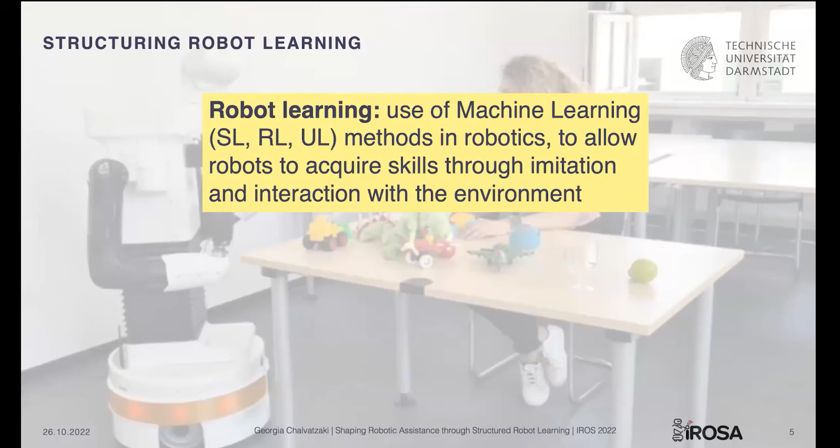I hope you all know that robot learning is the field that uses machine learning in robotics to allow robots to acquire skills through imitation and interaction with the environment. Now, to give you the gist about the research in my group, iROSA, we take into account the structure of the problem to enable faster, safer, and scalable learning of robot behaviors.

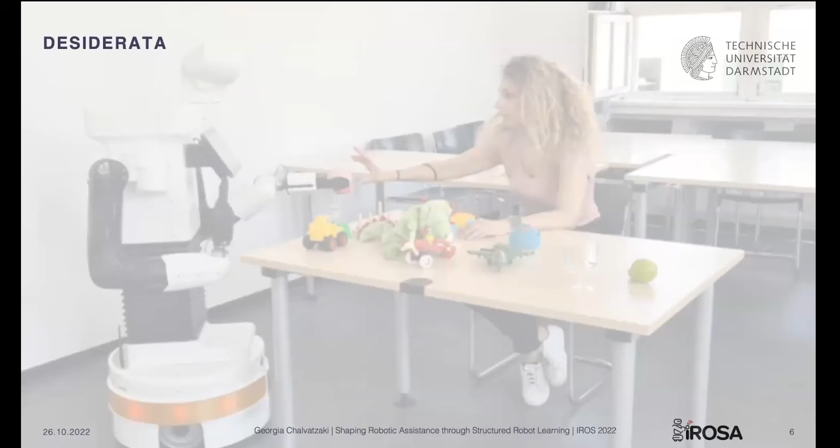And what can we achieve with structured robot learning? Three key properties that, in my opinion, are necessary for robots to acquire behaviors like the ones of Rosie the robot. First, coordinated and generalized manipulation skills. Next, fluid and safe human-robot interaction. And third, scalable long horizon behaviors.

Now I will point you to 5 key areas in which structure couples with robot learning to give us a flavor of our desiderata of assistive behaviors.

But before we start, let's take a look at this handover scene. The robot needs to understand the intention of the human, and it needs to effectively coordinate and position itself in the environment, and be able to understand grasping actions up to the delivery of the object. Most importantly, it should act safely. And this is where structure comes into the game.

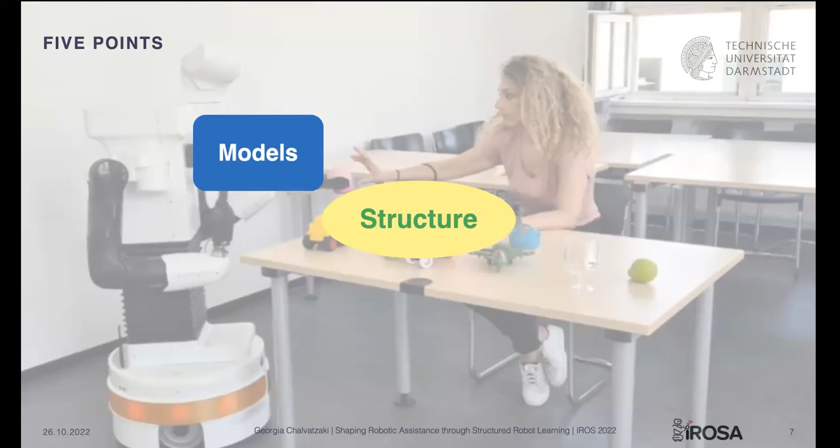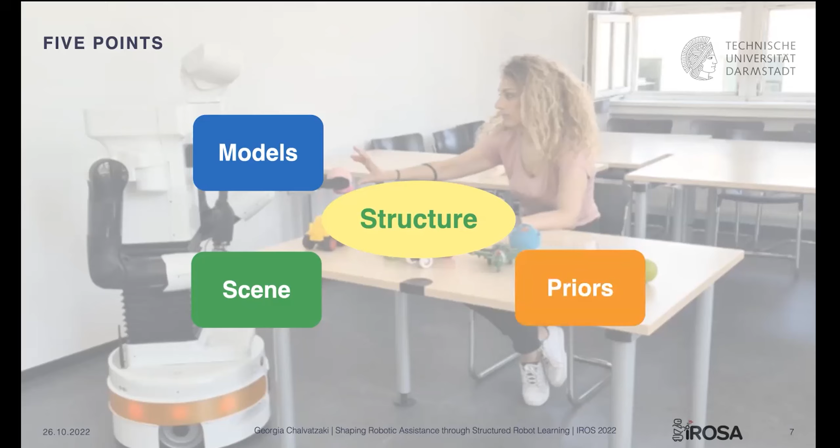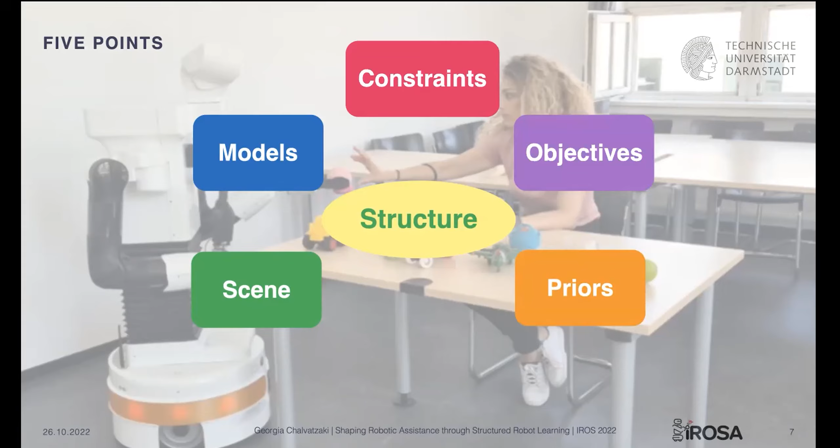So first, we will see how we can structure models for effective human-robot interaction. Then we will see how we can exploit the scene structure to learn long horizon behaviors for manipulation. Next, we will see how we can exploit the structure of the robot itself as a prior for learning mobile manipulation. We will arrive at the point of seeing how we can learn data-driven objectives that can also be structured, arriving finally at the crucial point of safety, where we will see how we can learn and structure constraints.

We will see all these points in some different but representative test beds, but they all contribute to my idea of scaling robotic behaviors for assistance.

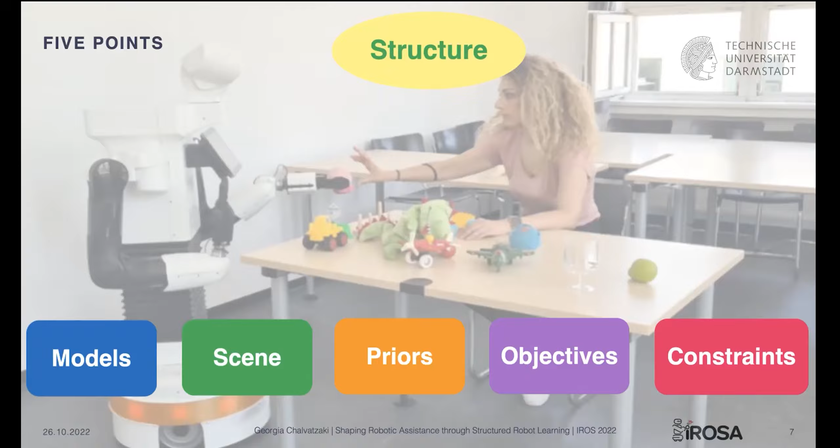My first experience with robotic assistants was during my PhD, when I was studying models of human behavior. The objective was to develop algorithms to control a mobility robotic assistant to help elderly people with various mobility issues, like Parkinson's and so on, to provide them support and act proactively.

We realized that patients with different pathologies have different walking patterns that are quite different from the normal gait cycle. For that, I developed a structured walking model with which we were able, only from laser data, to track the human and also do gait analysis online, such that we can also assess the rehabilitation process.

But then we questioned ourselves: how can we use this information to actually control the mobility assistant?

To formalize this problem, we viewed it as a human-robot couple navigation problem in which the robot is effectively always in front of the human and it has to maintain a specific distance and orientation that has to be also relative to the way its human walks.

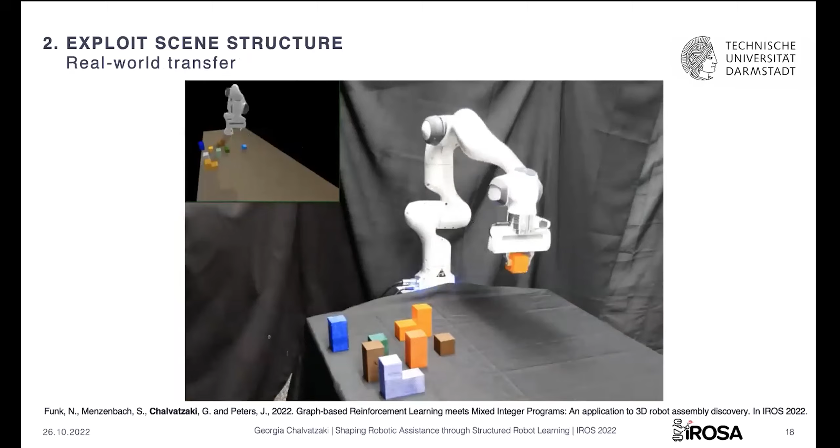And we have shown that, yeah, sequence matters, because if we just deploy the heuristic, we end up with several collisions, while our approach, while using also search in real time, yields much better results. And also, it allows us, by deploying a digital twin, to transfer directly into the real world without needing any further retraining.

And what is also important to note here is that this agent also has an additional action that allows it to decide when it should stop the building process because it fulfilled the design. So it is pretty common that you have more building blocks than you need. So yeah, the agent generalizes pretty well in new scenes with unseen block types and so on.

So now we will see how we can exploit the structure of the robot itself as a way of learning effective mobile manipulation. So mobile manipulation is very difficult because you have to coordinate different embodiments. And Snehal Jauhri, who now also won the Best Paper Award in mobile manipulation, has shown yesterday that we have to actually use a hybrid action space. And what do we mean by that?

In our case, the hybrid action space is a continuous action space on the base placement, so position and orientation, and a discrete decision variable on whether or not we should activate the arm in order to execute a manipulation action. Now, in order to deploy this in our favorite deep reinforcement learning algorithm, we need to define a hybrid policy. And in this policy, we have a continuous part of the policy and a discrete part of the policy that is conditioned on the continuous part.

And in order to train this with automatic differentiation, we have to exploit also a Gumbel softmax reparametrization trick. Yet, in order to understand when we should activate the arm in order to manipulate something, we need to have an intuitive understanding of the robot's reach. So for that, we rely on classical robotics. And we design the operational workspace of the robot that intuitively tells you what is the frequency with which you can reach different 6D targets in the workspace of the robot.

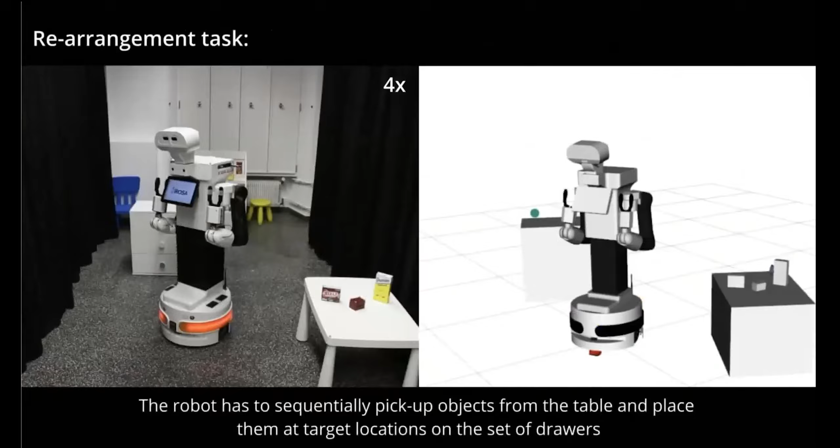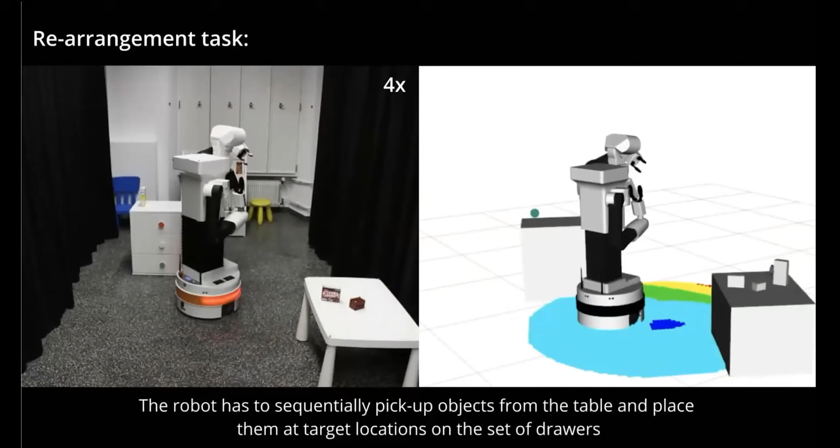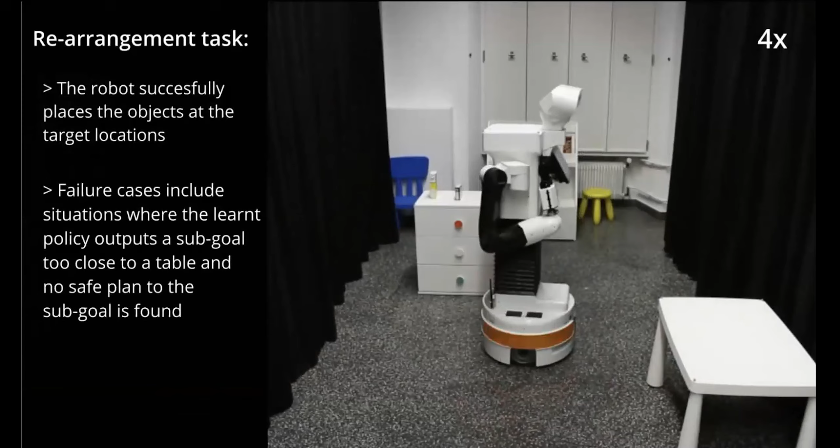And what is important to understand here is that our approach is a higher level approach. It gives us some sub-goals that the agent needs to reach with our favorite motion planning or reactive control, whatever we want for navigation. And we can effectively also use the same smooth Q-reachability maps for resolving rearrangement tasks where the robot has to take the objects from one table and transfer them to the next table and so on, as it now has an intuitive understanding of the reach and how it should effectively place itself. And it only takes a few steps to realize these tasks.

But when we talk about manipulation, we don't only care about pick and place. There are tasks like pouring water in a glass for which you cannot effectively design the objective. And in these cases, you have to learn them from data. Now, yesterday, An Thai Le introduced a method for learning implicit priors, or if you want, cost functions for motion optimization. So given a set of trajectories, we propose to use energy-based models to learn our implicit priors.

And why do we care about energy-based models? Well, they can capture the multimodalities in the data. They are composable such that they can be combined with other objectives that can be learned, or they can be hand-designed. And they can be represented in any space. For example, we can learn them directly in the task space and effectively plan with forward kinematics and evaluate the trajectories. But let's get some more insight about how we can use energy-based models in trajectory optimization.

So we have to take a planning as inference perspective. And in this case, the trajectory optimization can be formulated as a maximum a posteriori problem, given that we have also some initial distribution. Now we can factor this prior distribution, especially if they belong to the exponential family as our energy-based models. And with that, we get structured planning objectives on which we can also add contextual priors, for example, initial explicit distributions about initial trajectories, and evaluate them on the learned ones.

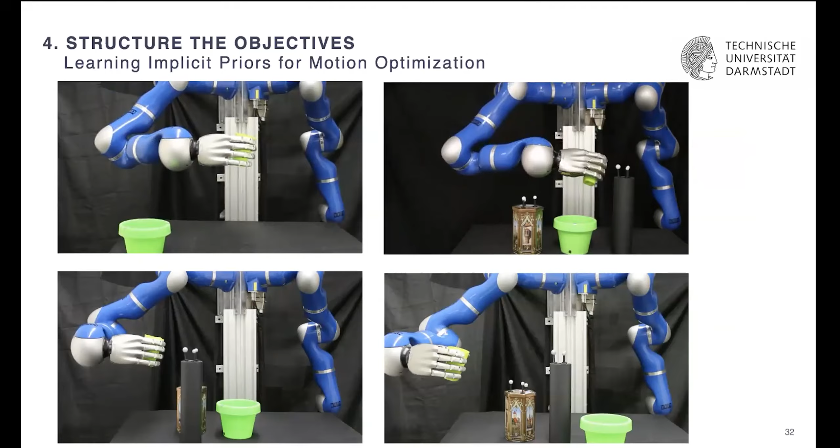And effectively, we can also learn pouring tasks in which we learn the initial landscape by demonstration. And then we show how we can combine this cost function with additional cost functions on smoothness and also obstacle avoidance. And no matter how we change the scene, the agent is able to always fulfill the pouring task without losses.

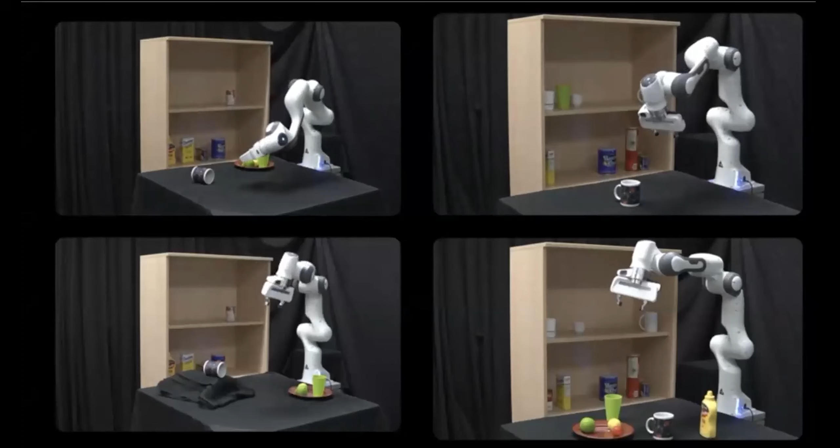And moreover, we have shown recently that we can deploy diffusion models, which are quite a trend right now in image generation, in order to learn manifolds of objects in SE3 and have the grasp distribution in SE3 by diffusion. And by having these grasp distributions by diffusion and having direct access to the gradient, we can employ stochastic gradient Langevin dynamics and plan by diffusion, and in a single optimization process resolve the effective grasp and base placement of a mug, like in this case, in the bookshelf scenario, given additional objectives for collision avoidance.

And finally, we arrive at the final point of how we can safely plan interactions or manipulations, and we will see how we can learn constraints. Now, yesterday, Puze Liu introduced the regularized deep signed distance fields. Deep signed distance fields are commonly used, as you know, for defining obstacle avoidance objectives. However, they are a bit challenging to actually design.

Now, with our approach, we are able to effectively learn at any scale the signed distance fields of articulated objects like robots, because we deploy a regularization term with learnable parameters that allows us to effectively learn the zero level set of our signed distance field, which means that we can reconstruct with great detail human manifolds and also have smooth distance fields at any level.

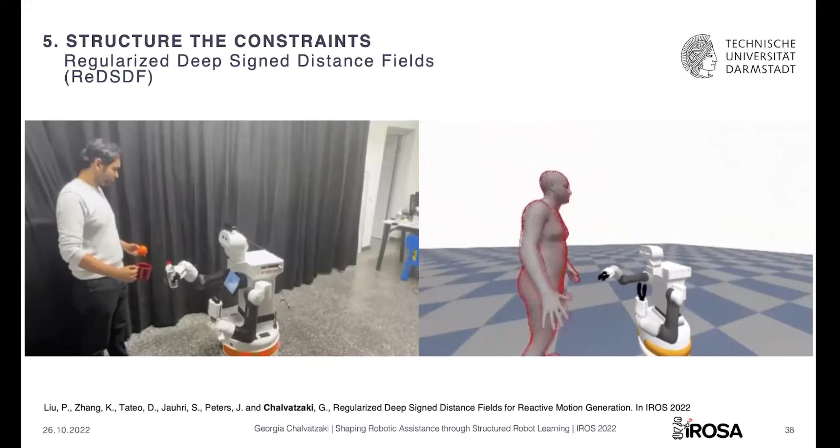And here you can see an example of how we can smoothly change the level set while interacting with the robot, and while the robot approaches the human, this collapses, let's say, to the human manifold, representing some sort of safety layer over the human.

But to learn human-robot interactions, we need to guarantee some sort of safe exploration in our reinforcement learning agents. And for that, while other approaches would reject bad actions or add a safety layer, we choose to act on the tangent space of the constrained manifold. So we effectively construct the constrained manifold. And we have shown that we can use this with generalized nonlinear control-affine systems.

And thanks to the Jacobian of our system and also of the constraints, we are able to have a direct mapping from the actual action space to the actions in the tangent space, such that we can guarantee that we never violate the constrained manifold. And this allows us to learn challenging tasks like reactive navigation with differential drive constraints, where we also have a random agent here which we have to avoid, and also the collisions with the environment.

We can deploy our learned distance field directly because we have access to the gradients, and learn reactive manipulation in constrained environments like the bookshelf, and also transfer it into the real world without losses from sim-to-real gaps, because our constraints are always active.

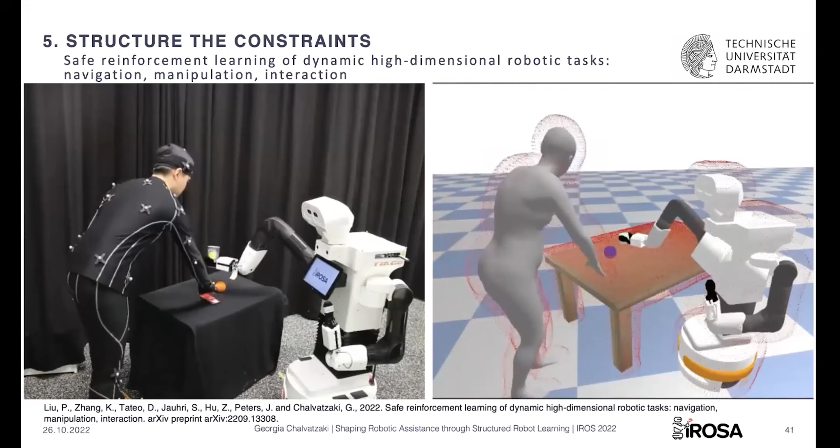And finally, we are able to learn human-robot interactions. This is a scenario of, let's say, shared workspace, where the robot has to deliver a cup to the human, just like when Rosie was delivering a glass of water to George Jetson while he was reading the newspaper, while in these cases, the human just looks at the phone.

And you can see here that no matter how the behavior of the human changes, the robot is always able to avoid collisions with the human that moves dynamically into the scene, and also with the environment, so the table, the robot itself, and without turning over the cup that it has to deliver.

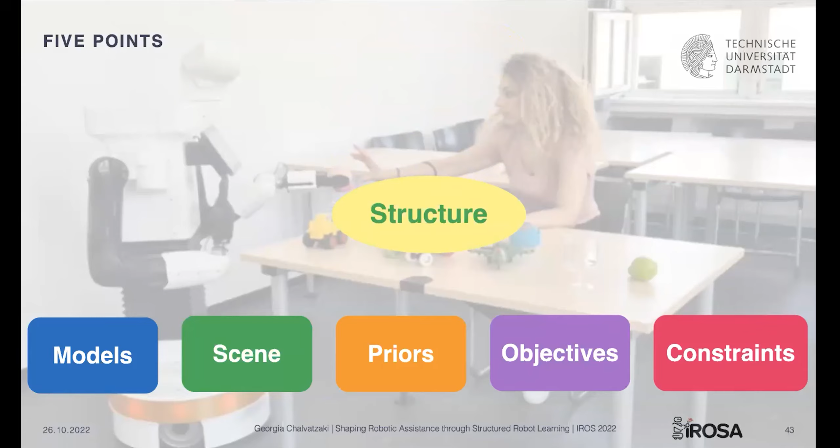So I have walked you through 5 points in which we have seen how structure can be used in robot learning for scaling robot behaviors. And while we have seen these points in different test beds, they all can come together in order to learn and scale mobile manipulation to effectively achieve this vision of intelligent robotic assistants.

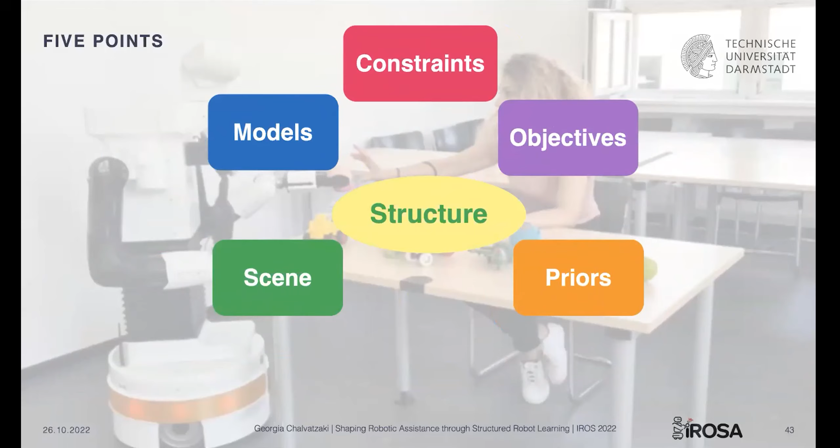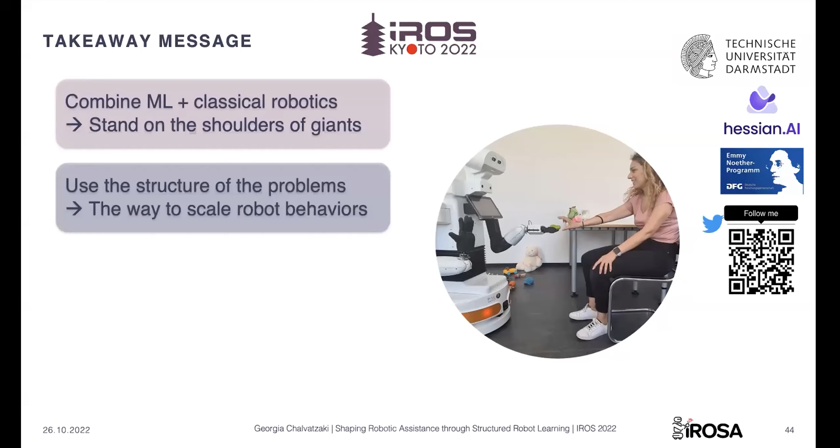And if I can give you a takeaway message, I believe that we need to remember that we stand on the shoulders of giants. We need to effectively combine our knowledge of classical robotics and augment it with machine learning methods, such that we can scale them up and create hybrid methods. We need to use the structure of the problem. This is the way to scale robot behaviors.

We need structured models of human behaviors and also consider the actual manifolds and not just skeleton representations of humans, as this is the way to acquire smooth and safe human-robot interaction. And finally, I think that we should put our focus on learning mobile manipulation skills, as this is the way to embodied intelligence in order to achieve the vision of intelligent robotic assistants.